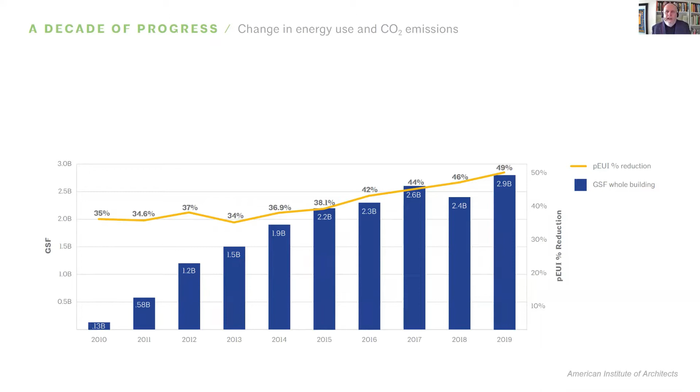Keep in mind, there are some 20,000 architecture firms in the US and only about 200 of them actually submit this information. So arguably what we're looking at here is the tip of the iceberg with the leading edge of our profession. And the leading edge is doing very slowly around these things. There's a gigantic gap between where we set out to be and where we actually are.

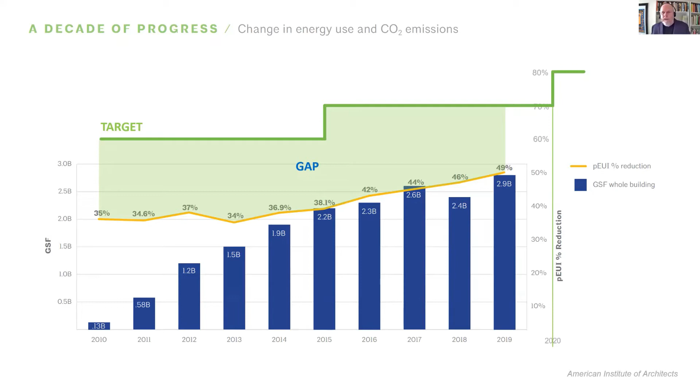Why is that? My theory is because of this thing we're talking about now. We think of sustainability as being about the technical systems. It's about materials, methods, and systems, and not really about design.

This is why I titled this talk, Architecture's Great Divide. I stole my own title from another Huffington Post article I wrote a few years ago in response to Aaron Betsky, the critic, who, in response to the top 10 awards that year, said they have, quote, sustainable credentials but lack other design merits, meaning we shouldn't award buildings for good performance, just for good design. He's very vague on what he means by good design.

A decade ago, you may remember Vanity Fair put out an article where they interviewed a little over 50 of the world's leading architects to ask them what the most important buildings of the previous 30 years were. And not one building in that list of about a dozen that got multiple votes had any sort of high performance ambitions. So it led to the impression that the A list in architecture really wasn't interested in sustainability.

So to test this, for my column in Architect at the time, I asked the same number of people, but leading green building experts, to say what they thought were the most important buildings of our time that had high performance from the same period, 30 years.

And if you look at the two lists, there's not a single American architect on both lists, and there's not a single building on both lists. And the two European architects, Foster and Piano, whose work is associated with decent performance - the work that showed up on the A list was not really high performance because it predates their interest in these things.

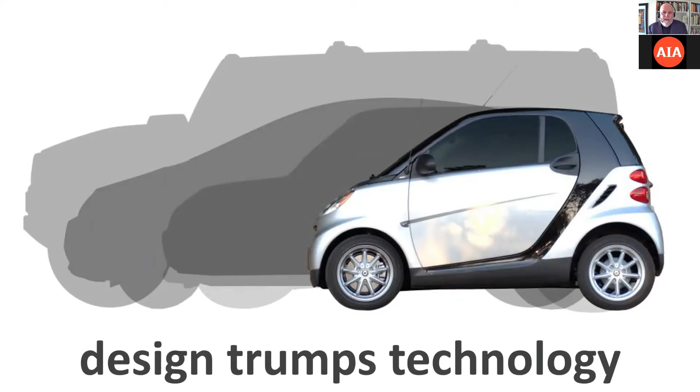For 10 years, I drove a Smart car, which at the time got better mileage than all the American hybrids just because it's small, round, light, and compact. It's like driving around a big walnut. So I like to say that design trumps technology. I lived in Charlottesville, Virginia at the time, and I was the first person there to have a Smart car, so everywhere I went, people would turn and smile. I like to think that I'm spreading joy through the land.

The book is organized around three kinds of shape: shape for economy or conservation, shape for pleasure or attraction, and shape for place or connection. The rest of the talk is going to be organized around these three principles.

Starting with conservation, we tend to think of performance again as living under the hood, in the engine of a building rather than in the chassis. It's about smart mechanical systems, glazing, insulation, et cetera. But research shows that up to 90% of the impact of a project is determined by the very earliest design decisions. It's in the napkin sketch, not in the technical manual. Where it's located, how big it is, orientation, massing, fenestration, can get you far more mileage than choosing smarter mechanical systems. A really good example outside our industry: if I asked you to design a smarter pot to boil water, that might seem like a daunting task.

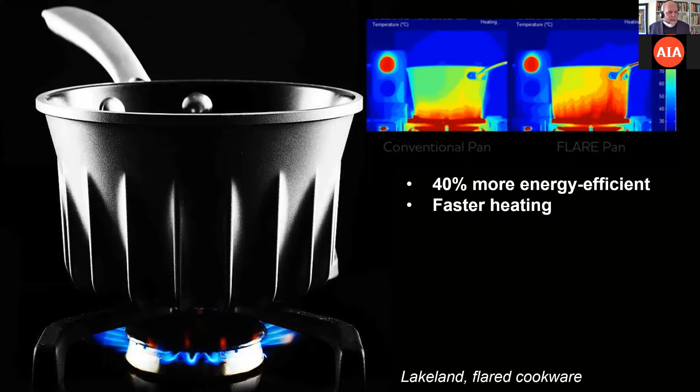Applying that to buildings, often if I'm in a live audience with architects and I start to show a moment diagram like this, I see people sweating, because architects associate moment diagrams with sleepless nights studying for structures exams in architecture school.

But really, this is maybe the most common shape in all of construction, a gabled box. And what's interesting is the structure itself is pretty simple, but if you look at the physical forces flowing through it, they're fluid, they're dynamic.

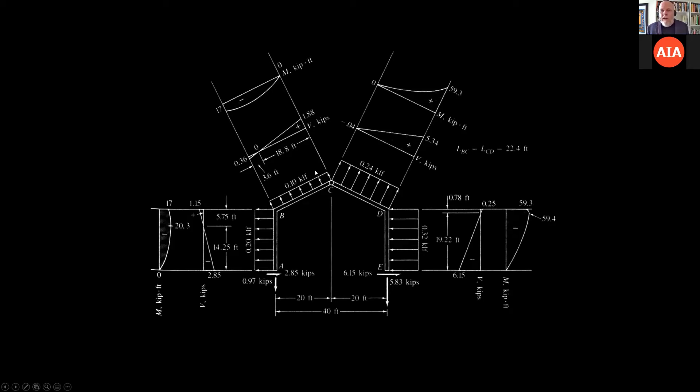The reason is we try to figure out the worst case scenario, that this joist or beam needs to be a certain thickness at a certain point, and then we just extrude that dimension across the entire length. We do that in every material, whether steel, wood, or concrete. We design for the worst case scenario, and then the entire length of the thing, whether it's a column or a beam, is built to that same dimension.

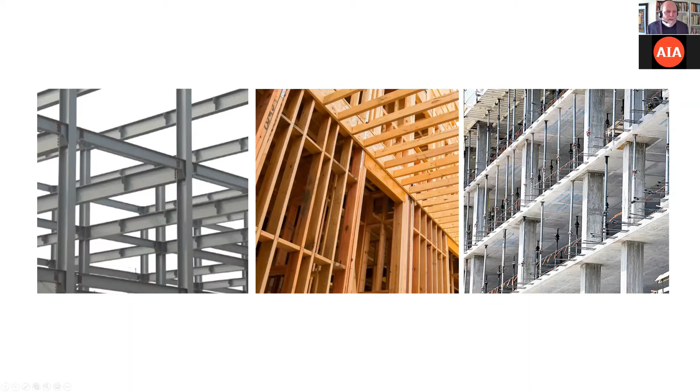So I would estimate that virtually every building you've ever set foot into uses about 40% more material than it needs to in the structure, because we tend to use parts and pieces that are industrially manufactured, mass produced in order to give you a kit of parts to use. So if you need a W6, you'll specify a W6, while you really don't need all that steel.

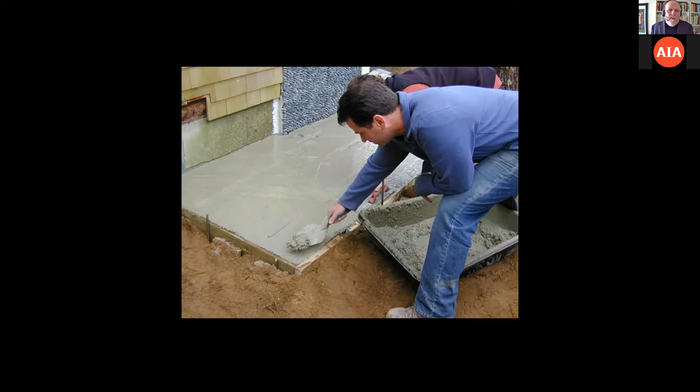By contrast, Mark West and his students at University of Manitoba for years have experimented with textile formwork, to be able to make concrete in any shape you want, as opposed to this, which is typically how we use concrete. Concrete will take virtually any shape you give it, but we tend to build little boxes, fill it with concrete, and once it sets, we tear away the box, and what's left over is box-shaped concrete.

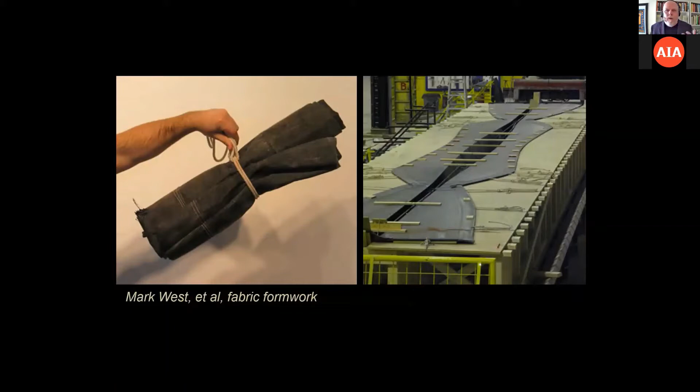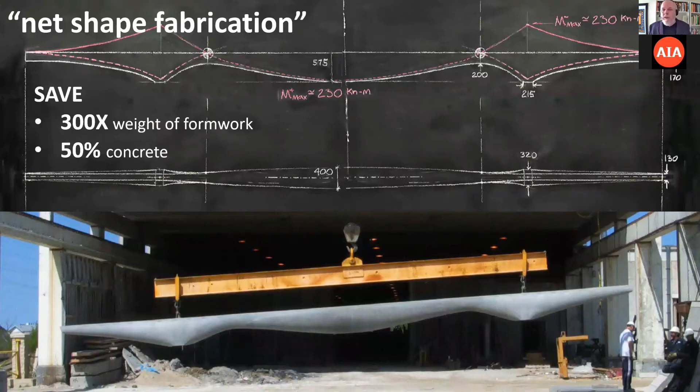Here's an example of what Mark and his students are doing. It's sewing it with fabric like a dress, so you can put material only where it's needed. Here's the moment diagram for this beam, and here's the actual beam. As a result, it saves about 50% of the concrete and 300 times the weight of formwork. Plus, it's incredibly beautiful, it's got this very supple, porpoise-like shape.

Now imagine if every aspect of a building, beams, columns, floors, walls, roofs, had this kind of ingenuity and shaped itself in order to just use the amount of material it needs. Would buildings stop feeling like boxes and cages, and maybe feel more like a forest or a skeleton?

This is another way of saying there's a relationship between form and performance, or image and impact. At one end of the spectrum, some of the most celebrated architects who've ever lived have compelling form without compelling performance. In fact, what makes the form compelling to architects arguably undermines its ability to perform. You've got a lot of material you don't need, and because of the wacky geometry, it tends to face a lot of different directions, so it gets a lot of heat gain from the sun.

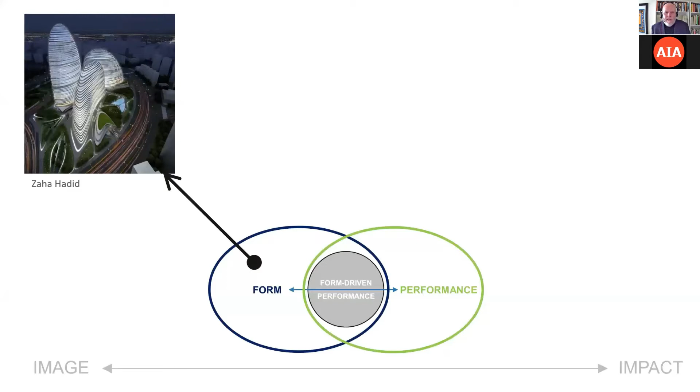At the other end of the spectrum is compelling performance without compelling form. Imagine this is a net zero or LEED platinum building, but not terribly inspired to occupy or be near, which is why people like Eisenman and Vignoli dismiss these kinds of buildings.

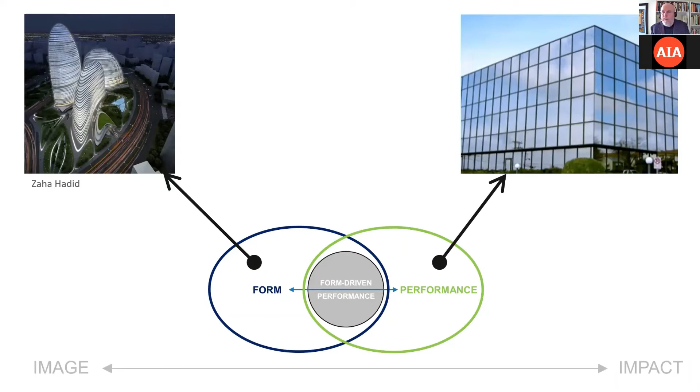The sweet spot in the middle is the idea that performance is driven by the form. An early example would be Foster's City Hall in London, which leans into the sun, so it's self-shading on the south side. It leans away from the riverwalk along the Thames in order to bring light down onto the public. It's more transparent on the north than on the other sides, and it minimizes the surface area facing the sun. As a result, it has far less surface than a conventional office building, and it gets 75% energy reduction.

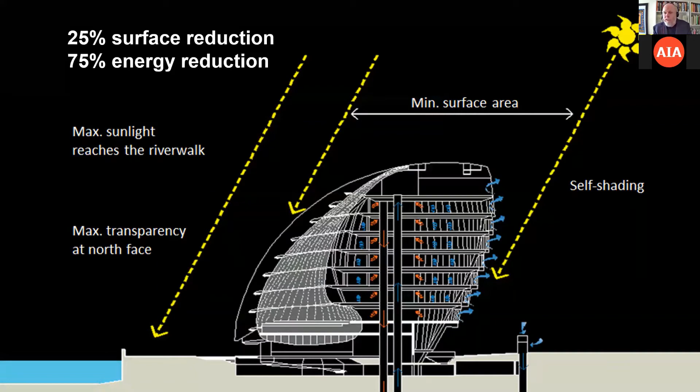This was 20 years ago. If you remember the chart I just showed you of the AIA progress, the cream of the crop of American architects are on average at about 45% energy reduction. 20 years ago, this building was getting to 75% just because it was shaped differently. I like to call this self-sustaining form.

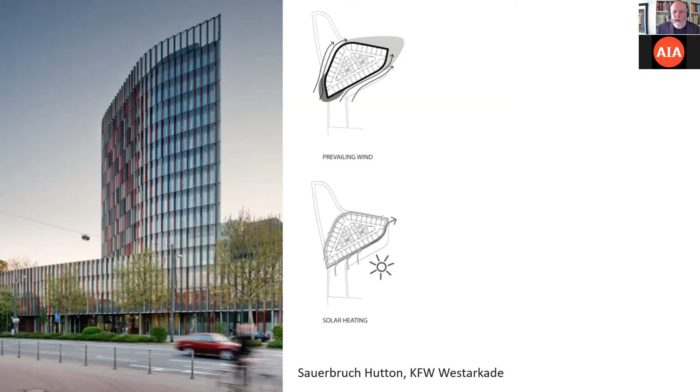Another really interesting example is Sauerbruch Hutton's Bank Tower in Frankfurt. Most of the great examples of this kind of thing are in Europe, not in the US. It's got a west-facing site, which means in the afternoon it gets a lot of heat gain from the low sun angle. But what they did is extrude a retail podium up about 4 stories, and then this airfoil-like tower rises up out of that, minimizing the profile at the hottest time of day. This wing shape also tends to encourage wind across the face, which increases passive ventilation.

So they're calling it the most energy efficient office building in Europe.

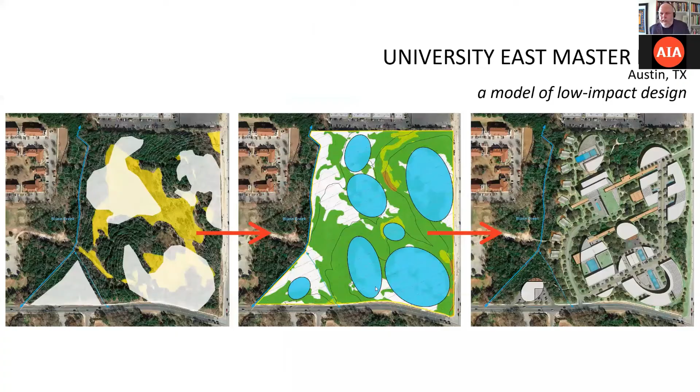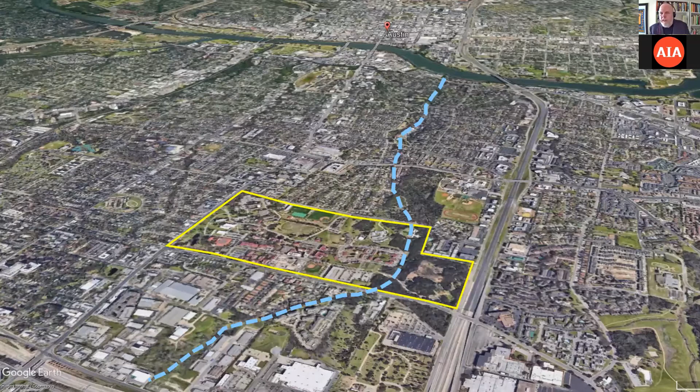Here's the river, and Blunn Creek runs right through here, and it's a fairly sensitive watershed. So the idea is how to develop this parcel of land without upsetting the watershed. Austin is in the middle of daylighting all its creeks and streams, making sure they're conserved. This is the existing condition. There are parts of it that are fairly bald; the trees aren't growing there.

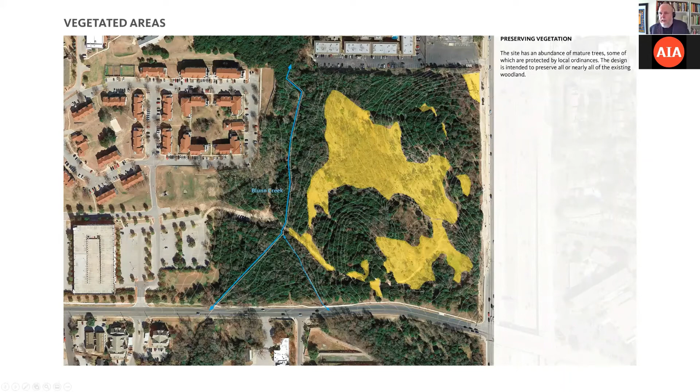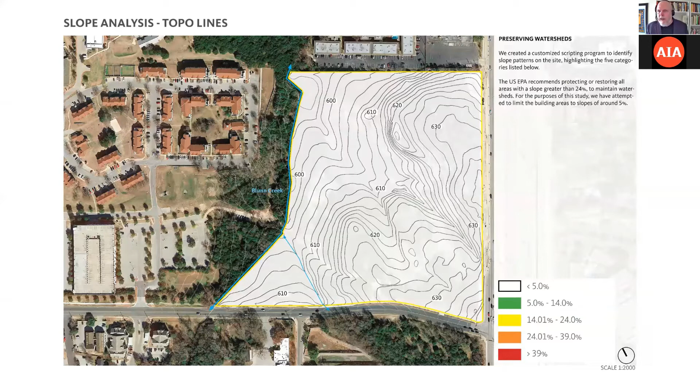When you look at what the EPA recommends as a maximum slope for building without upsetting watersheds or having to move trees around, and map this on, we created a custom script to look for that kind of topography, and identified the places where the slope was less than 5%.

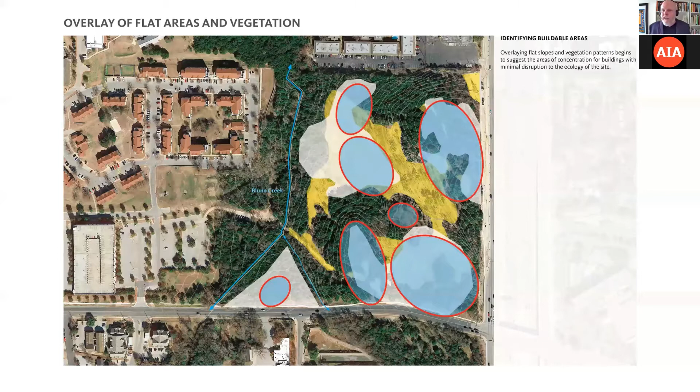If you overlap that with the spaces where there are no trees right now, you start to get this figure that suggests where you could develop sensitively and responsibly. Then when you overlap standard recommendations for building orientation around the wind and the sun, you get this cross grain with elliptical shapes, which is exactly how the plan was extruded. So even at a master plan level, it looks the way it does because it works the way it does.

All right, so that was shape for conservation. Shape for attraction is the idea that we can shape things for pleasure, which is something designers have always wanted to do, but it's typically not informed by science. So if the idea is to collapse the divide between art and science, what can we learn from science about the aesthetics of pleasure?

I've often said that what we do for a living as designers is not really much more sophisticated than 'I like blue, you like purple.' How do we resolve that? Well, we can't resolve it if I can't tell you that you should like blue more than purple, unless I have some objective criteria for evaluating that.

How is this related to what we perceive as sustainability, meaning conservation of resources? It's always been defined much more broadly than that, but it's perceived very narrowly around conservation of resources. I love this quote from a Senegalese poet saying that in the end, we conserve only what we love, which begs the question: what do we love?

People tend to love babies. If you took a Psych 101 course in college, you may be familiar with Konrad Lorenz's work looking at babies and puppies and other things that have round heads and big eyes. There are certain proportions we tend to gravitate towards because we're hardwired to be caretakers for those kinds of proportions.

I think that's one of the reasons why people loved watching me drive around in the Smart Car—it's like driving around in a big baby head. Someone once told me if you want to manipulate your audience, show either a baby or a puppy. So I like to think I'm being doubly manipulative by showing you a baby and a puppy.

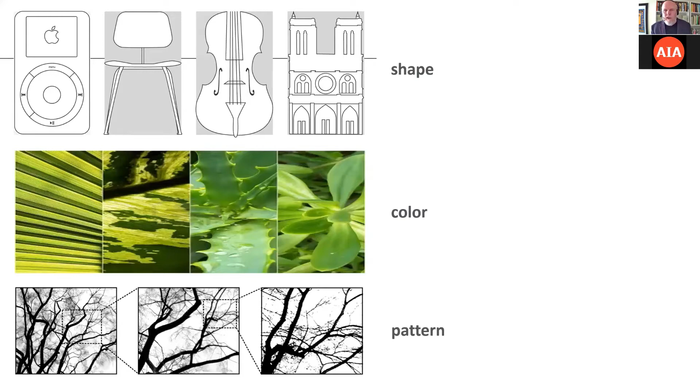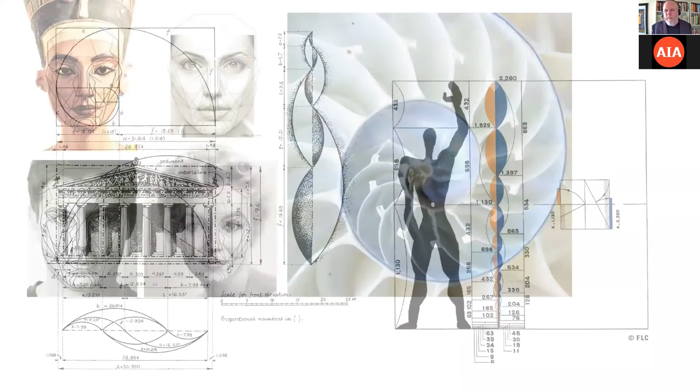Over the last few decades, there's been a wealth of research into shape, color, pattern, texture, space, proportions. This is the designer's toolkit. We know more today about the mechanics of all this than we ever have in human history, even though some of the greatest buildings ever designed were driven by these kinds of things. People who study aesthetics basically say that beauty is merely a function of mathematical distances and ratios. It's geometry, proportion.

These are things that can be systematized easily. It's not magic. A corollary to this is the savanna theory, what I mentioned with E.O. Wilson before. If you've heard the term biophilia, meaning we have an innate attraction to other living things, that comes out of this idea of the savanna theory. The theory is that because the human race lived the first 98% of its evolutionary history in a particular environment, namely the African savanna, before we moved away from that,

everywhere we go, we seek out similar environmental, spatial, and visual cues. So we tend to gravitate towards rolling landscapes with stands of trees, little ponds of water, rather than thick forests or open plains. This is why the open ocean intimidates us. This is why the heartland with giant plains and big sky tends to be intimidating.

Now, the most dominant image on the African savanna is the acacia tree, this image here. And there are lots of studies about why we're drawn to that. Psychologically, we associate it with sustenance, safety, and shade, but also that particular pattern, which is called a natural fractal. Scientists look at this, and a natural fractal is one that is self-similar at every scale. So if you think about a tree, as opposed to a computer-generated, artificial fractal which tends to be identical at every scale, this has a loose similarity at every scale, which I think is the difference between it seeming kind of stiff and mechanical versus seeming much more pleasurable.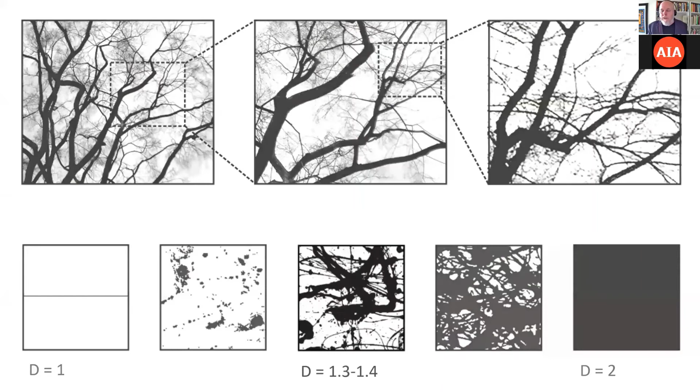Mathematicians classify natural fractals between 1 and 2. 1 is the open Sahara or the ocean. 2 is nighttime or the thick forest. And what they found doing skin conductance tests and tests of heart rates and such is that there is a sweet spot in the middle, a certain proportion of fractals that we tend to enjoy so much that it relaxes us. It can reduce stress by as much as 60% just by being in our field of vision.

In 1949, Life magazine called Jackson Pollock the greatest living American painter. This was when he got to a point where, according to the research, his canvases were instinctively creating these natural fractals. The theory is he had spent years and years flinging drips and drabs of paint on a canvas and instinctively pulled out this evolutionary memory that we all have of preferred patterns. So at the time he was being called the greatest living American painter, he was producing natural fractals without knowing what they are. So one attempt that I've done to apply this kind of research is in a biophilic facade.

The idea is, if we know that these kinds of patterns can reduce stress by being in your field of vision, could we apply them to the workplace and address a fundamental problem of the workplace, which is stress? There are lots of things, I'm sure everyone on the call knows, that daylight connection, the outdoors, quality views can lower stress and help people feel healthier and happier, more productive, etc.

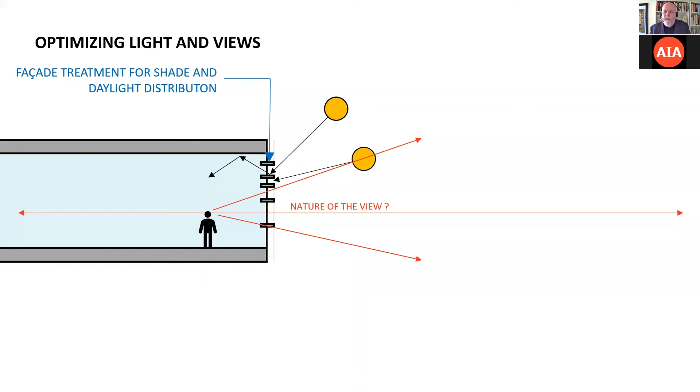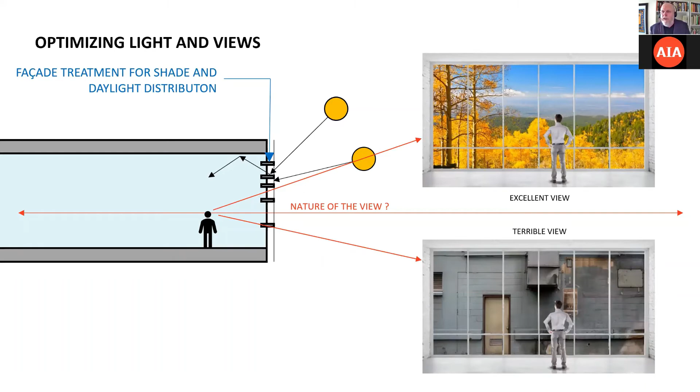But you can control daylight to some degree. You can't really control the nature of the view. So if you're staring at this, then that feels like magic. If you're staring at this, not so much. So what can you do in the latter case to try to improve what you're staring at?

So the idea would be, if you look at all the research in biophilia, I think if you mention the word biophilia to architects and designers, they immediately think, let's plant some trees and be done with it. But not all trees are created equal. What the research shows is that certain kinds of trees in certain kinds of densities and patterns actually have these effects and others don't. And more importantly, the research all says that you don't need actual trees, you just need the fundamental geometric principles of these kinds of natural patterns. So the trees aren't emitting some sort of invisible pheromone that's making us all happy. It's just aesthetics, it's geometry.

So you can imagine abstracting a view like this and using it to do several things on a facade in, say, an office building. You can shade the facade, you can bounce light around, you can frame a view, and also relieve stress.

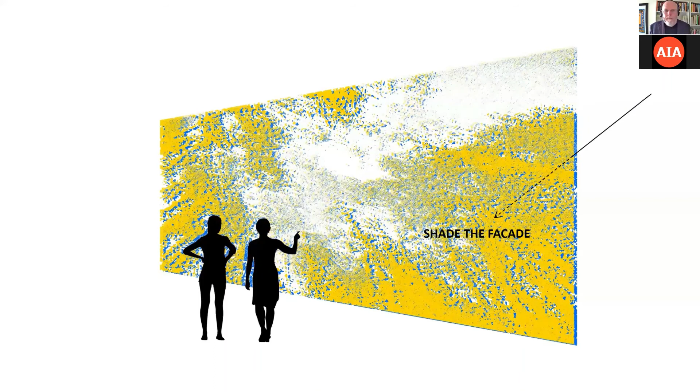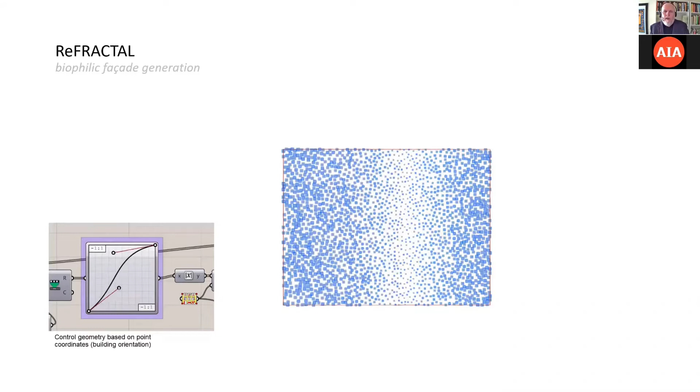So the team I was working with at the time, we customized a script to look at: could you take any surface—imagine this is an entire facade or just a window—and have this customized script apply the idea of natural fractals to it, without you having to make it up every time? In some versions of this that we studied, we were able using these patterns to get to daylight autonomy just by studying different kinds of densities and patterns on a facade.

All right, so that was conservation and abstraction, and I'll end on the idea of shaping for a particular place. Now, I often hear that design should mimic nature, and there are lots of reasons for that, which suggests we should understand nature better. If you look into nature, you get this seemingly endless variety of hills and hummocks and streams and beaches. There's an incredible richness in nature, and what we tend to give back to it increasingly feels pretty generic.

In a way that I literally Googled McMansion and this is what I got—I have no idea where this is, so literally. Architects are fond of dismissing fast food franchises such as McDonald's for building the same building everywhere, but then we give awards to Frank Gehry for doing exactly the same thing.

What's the challenge with that? I think we tend to reward architects who have this consistent style in their work, because we think architecture is an art—we need a recognizable vocabulary and the artist's body of work. But as I like to say, the signature style is the single biggest obstacle to sustainable performance. If you know ahead of time what a building is going to look and feel like, simply because that's what you do every time out of the gate, then you rob it of an opportunity to be tailored to the unique circumstances of the people and place you're serving.

By contrast, Schindler's Lovell House in LA—a lot of his work looked like this because everyone's work looked like this at the time, the sort of European modernism. This was the precursor to Richard Meier. But the project he did in La Jolla fascinates me, because it's an application of modernism to local materials in a way that feels very San Diego, and I love that. It's one of the rare examples of a world-famous architect adapting to the unique circumstances of the place.

So I'm fond of saying, I think that what we're taught in architecture school about what drives good design, much of it needs to be turned upside down if we're to address the unique challenges of today. We are taught that form follows function, and when Louis Sullivan said that, what he meant is that by function he meant programmatic use. So an office building should look like an office building should look like an office building, because they all function in the same way.

But if you look at indigenous and vernacular building traditions, it's the opposite—form does not follow function. If you look at a Virginia dog trot versus a New England colonial, it's the exact same function.

It's a single family house, and yet they have very different forms because of climate. The dog trot is low, spread out, with a big hole in the middle to promote breezes, because the controlling condition is that it's hot and humid in summer. New England colonial is the opposite—it's compact because it gets really cold in winter, so they try to keep the windows small and conserve the heat in the middle. So the surface to volume ratio between these two is very different.

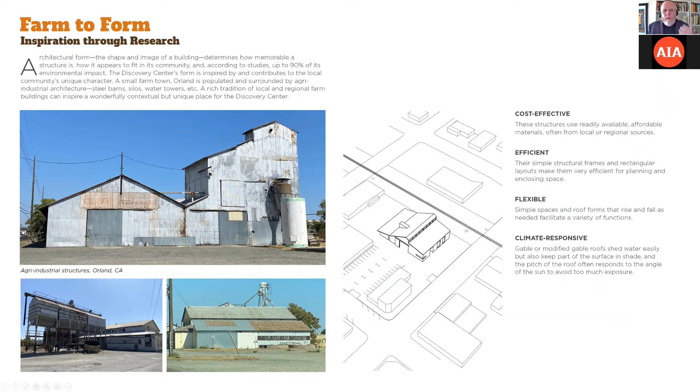So the idea that we can learn from bees and from farm structures in one building is what drove this. The idea that you get roof shapes uniquely tailored to the circumstances of whatever's going on under or around them became the driver for this building.

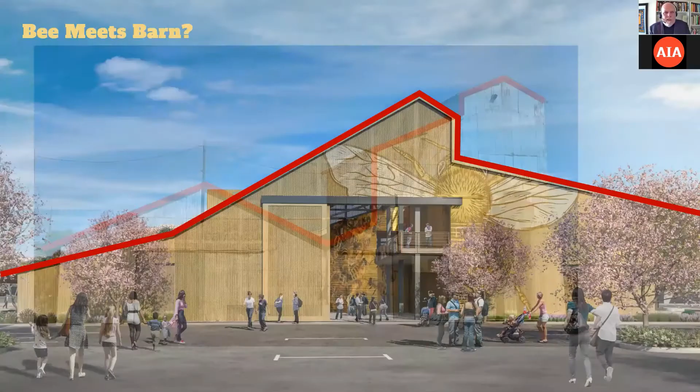So you can see here that this is basically just a big shed with this honey color. One of my colleagues who did these renderings said it's like a Winnie the Pooh nightmare. And I said, oh, let's make it a Winnie the Pooh dream.

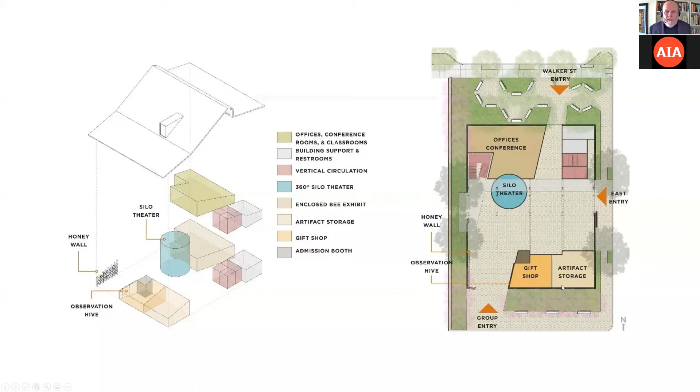The idea is that it's a big indoor-outdoor shed, very much like the architecture of the place, but it has this color partly to give it a brand, but also, as I said, that color is very smart for this climate. So it's a big shed where most of the communal space is not heated and cooled artificially, and it's got enclosed spaces for exhibits and other functions.

You arrive at the south side—it's mostly for school kids, so big buses come in and drop people off. There's this hovering rooftop pollinator garden. They were very concerned because they wanted to show off honeybees pollinating, but they also didn't want the kids too near the bees, worried about stings and allergies, so they lifted it up on this sort of stage set.

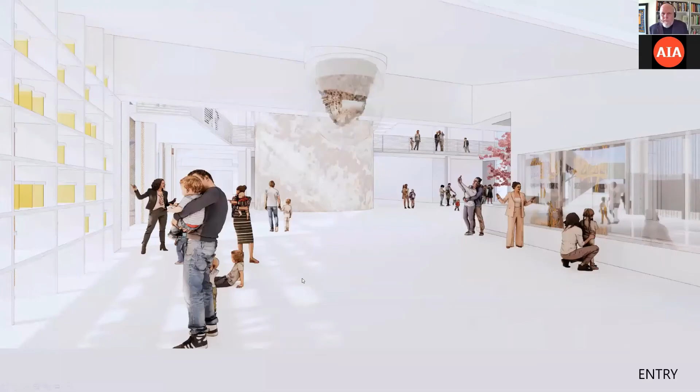So you move into the place by moving under the pollinator garden, and then into the entry foyer, where on the left is a giant feature—in their current temporary exhibit, they have what they call a honey vault, where they sell and show off local honey.

We like the idea of the west facade being this sort of inventory of huge jars of local honey, so that when the afternoon light comes through it, it spills a soft amber glow into the foyer. We're working with Integral Group on this, and they pointed out honey is an incredible insulator. So this is an early sketch, but we're looking at making this a sandwich facade with all these honey jars to insulate the west facade.

On the opposite face, we get this display showing the history of Orland and beekeeping here. Ahead is a silo theater where you get an introduction, and above you is hovering this observation hive, just under the pollinator garden. As you move in, the bees crawl down from the pollinator garden into this hive, and you can imagine a group of kids hovering under it looking up at the bees.

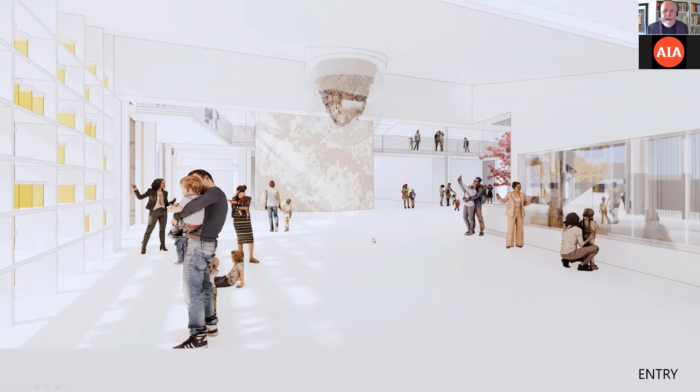You move into this space, that's the honey wall. And this is an observation area from upstairs. We're still working on this.

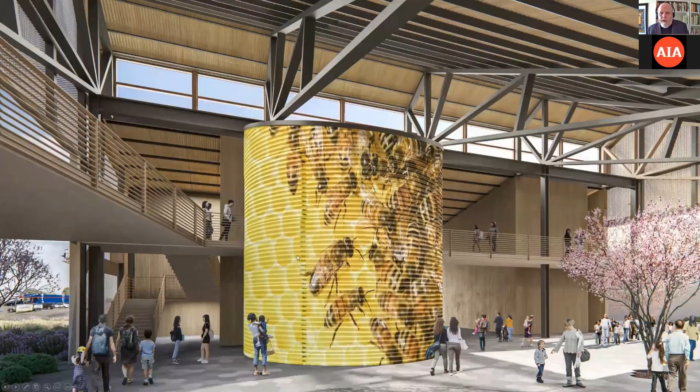This is an early rendering that looks a little like a coffee can, unfortunately, but the idea is that you move into this silo-like theater and get an introductory film about all this. Here's a live almond tree actually in the space, and the clerestory above is meant to eject heat, which I'll come back to in a second.

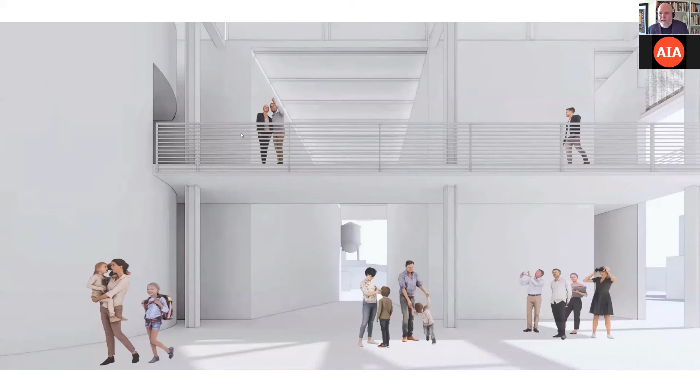Everywhere throughout, you get little glimpses of the surroundings. There's a water tower that says Orland on it that is the thing that's most memorable about downtown, so we wanted to make sure we're constantly giving you glimpses of the surroundings.

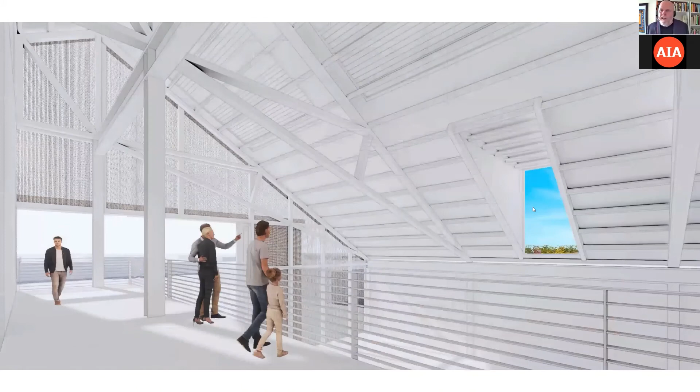Once you get upstairs, you get this dormer window that gives you a little glimpse of the pollinator garden outside. And then the top of the silo theater is actually a live video feed showing the bees outside in the garden at about 5 times actual scale, so little kids could be staring at a bee that's the same size as them.

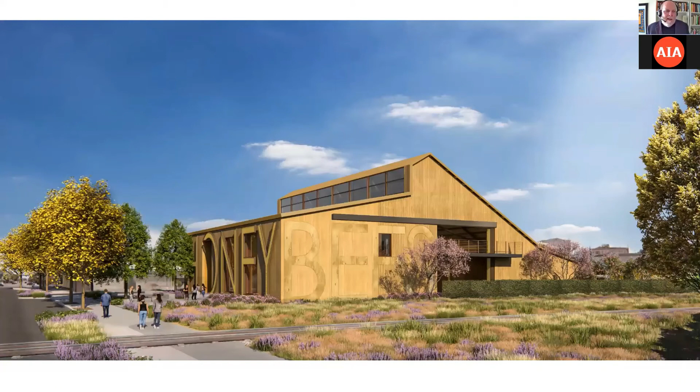Outside, in the most pedestrian heavy area, it's meant to seem like a big barn with a sign advertising itself. Here's a sketch that Integral Group put together looking at passive ventilation. There's a really interesting strategy they're recommending: hanging what they call a solar absorber, essentially a sheet of perforated metal under a skylight. It heats up, and as it heats up, it encourages heat to rise and get ejected through here.

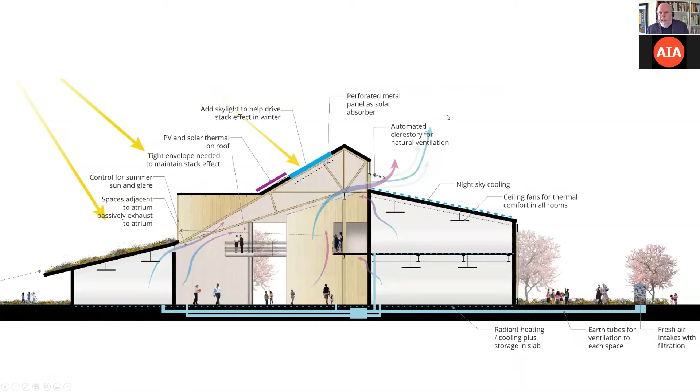So we're comparing that to the inside of a beehive, with the idea of bees flapping wings and moving heat out of the space. We also have this conceit of hanging a sign in the space that says no bees were harmed in the making of this building. This is pursuing LEED Platinum, Net Zero, and Living Building Challenge, so wish us luck.

Finally, I'm going to end on this: a couple weeks ago we had a project in the New York Times for a concept for a zero carbon community in Lagos. Lagos is plagued with overpopulation and a housing crisis. It's also been decimated by COVID-19, and it's threatened with all kinds of environmental degradation. So the idea is, how can you address the housing crisis and the public health crisis while also addressing climate change?

Without getting into specifics, one thing that fascinates me is that HMC did some research last fall, published on our website, about the vicious cycle between climate change and COVID. There's more and more research suggesting that because climate change is upsetting natural biodiversity, it's paving the way for novel viruses like COVID to come into being. So the prediction is there will be more viruses like this.

So there is a connection between climate change and COVID, yet one of the standard recommendations for physical distancing in buildings is decreased density, meaning buildings get larger. Our research shows that if you take the standard 6-foot physical distancing recommendation and apply it to every commercial building in America, the building stock would grow by about 11%. Without significantly reducing energy consumption, that additional 11% would be like putting 27 million extra cars on the road.

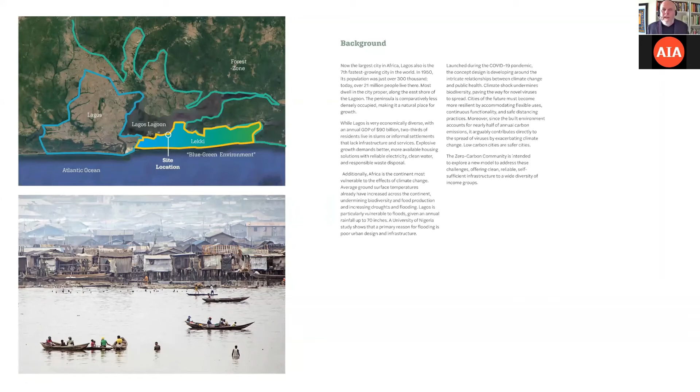We've done our research, and this is what led a young Nigerian developer to reach out to me, because he saw an article I wrote about some of the things I just described. We found that this part of Lagos is not predicted to be underwater as a result of sea level rise, but it tends to flood very badly. Lagos gets something like 70 inches of rainfall annually because of the monsoon season.

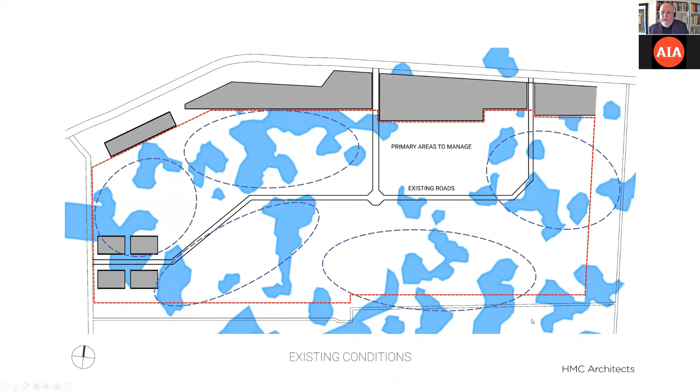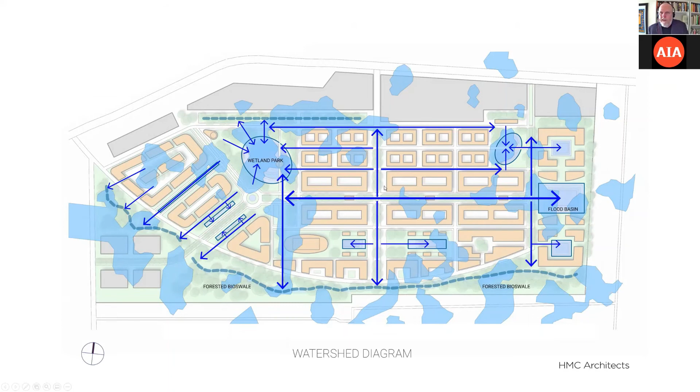This is our site. You can see where it tends to pond during flooding season. So the idea is how do we manage these areas with water responsibly by putting a development here? The thought is that we can knit a development in here while creating urban space that collects water. During the dry season this might be an open green area, but during the wet season all the water moves to these public spaces, so you can get pretty heavy rainfall without it flooding your streets or buildings.

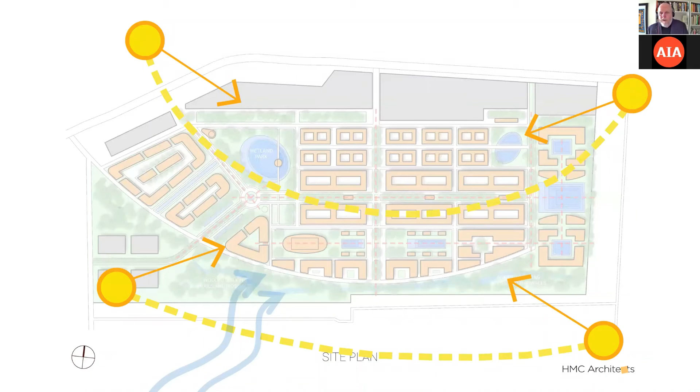The whole thing is organized around optimal solar orientation, pretty dense in most parts, while also having these relief valves of green urban lungs. The breezes come through here because the coast gets pretty great breezes for a tropical climate, since the ocean is to the south and the lagoon is to the north. This is how it lays out in terms of mixed uses. This area in the middle is what I'm about to show you.

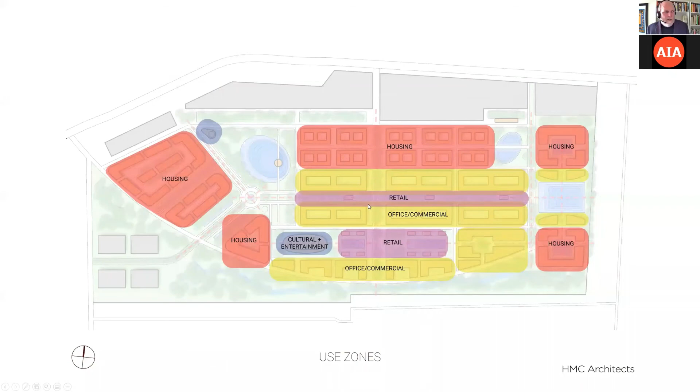Traditionally the pre-colonial peoples, and still the most dominant ethnic group in Lagos, is the Yoruba. The Yoruba word for street is Opopona. So we conceive this large urban thoroughfare as being like La Rambla in Barcelona, where you have pretty dense development on either side with a very wide median that's lushly vegetated down the center.

This is also heavily influenced by a lot of Nigerian pre-colonial planning—a lot of grid and a lot of courtyards, very heavy with geometry, but also using a lot of earthen materials and thatch and such.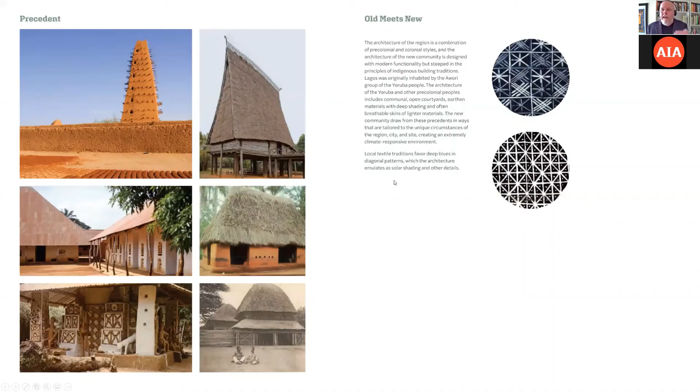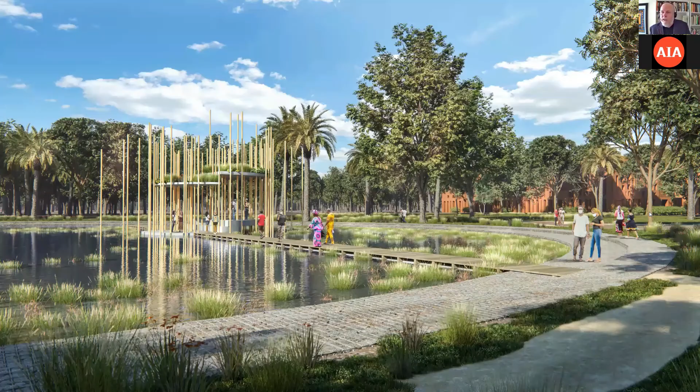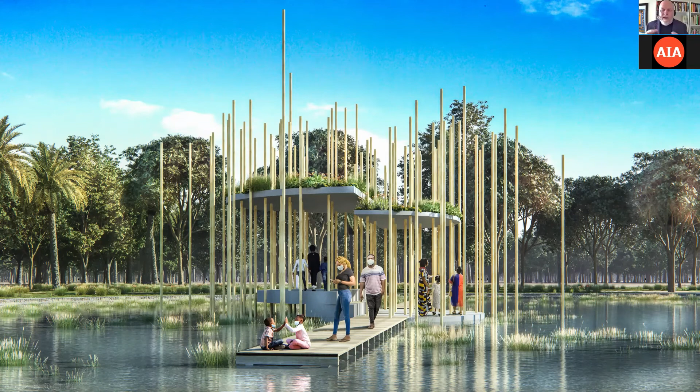The housing courts are kind of loosely based on this idea—deep relief to get lots of shade, but lots of social spaces and places for water to collect during the wet season. In the urban lungs I mentioned, there are places terraced along the edges, so this could get completely flooded with water but then recede and still be a pretty decent urban plaza. The conceit of these pavilions is a place to gather and get out of the sun, but also wooden flutes are traditional to the area—the idea is you have dowels of different lengths and diameters with holes in them, so as the breezes move through them, they play harmonic music.

Before the Renaissance, virtually everything that you see in these history books is sacred space because that's all that really exists: temples, mausoleums, cathedrals, etc. In the Western tradition, in most faith systems, the sacred space is seen as a place apart. Think about the Parthenon, perched on the Acropolis. It's meant to be seen as separate from everyday life. It's an arduous journey to get up there, and once you get up there, you're not even allowed inside, because only the priests were allowed inside.

There's an incredible book called Socrates' Ancestor that says the peristyle Doric temple evolved around the idea of oars and wings, so the columns are meant to seem as if the building could take flight any minute. Fast forward to today, that's exactly what Calatrava's work does—it's as if it's literally taking flight.

So contemporary architecture—when we're 18 or so and go into architecture school, we learn that great architecture is separate from everyday reality, and then we're shocked that contemporary architects, when given the most coveted commissions, create monuments that seem separate from everyday reality.